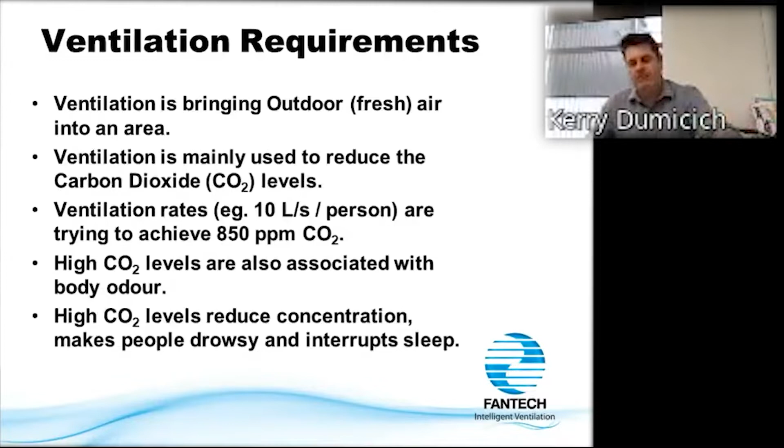Here's a bit from the Building Code of Australia, which says this is the amount of CO2 you should have in a building: 850 parts per million over an 8-hour time period. So while mine was 870 average over 8 hours, it's probably fine, sort of thing.

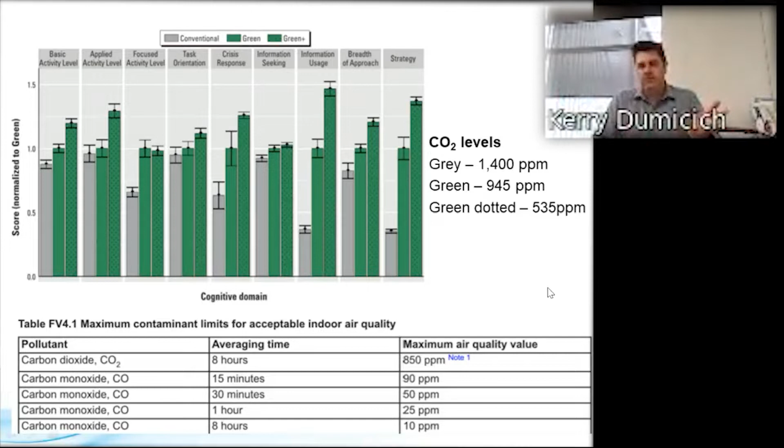Okay, that's all good. But what happens in reality? I've got these little CO2 monitors, which a number of you would have seen before, and I've done a few experiments at home. I gave one to a few people at Fantech, said take this home, put it in your bedroom overnight, and it records the levels over time. One of the employees here at Fantech, the levels got to 5,000 ppm in the bedroom overnight. We're supposed to achieve 850.

So we're 5-6 times the level of what we're supposed to be. We're actually getting to really unsafe levels at those sorts of levels. The reason was he had no ventilation in his room. He's in an apartment building, there were no windows to open, and we just assumed the apartment had good ventilation. It had terrible ventilation. So now he's got to figure out what he needs to do to improve the conditions.

I did it in my own house. My bedroom might have been 1,500 parts per million. I now sleep with the window cracked open a little bit, and that brings it down to about 700, and you get a better night's sleep. So again, CO2 levels affect how we actually sleep. It's actually important for all of us.

So increasing ventilation reduces the CO2 level. It also helps reduce the risk of transmitting viruses in the air, and that's kind of what we're really trying to focus on at the moment. But ventilation is important for lots of other things as well that we don't talk about very often.

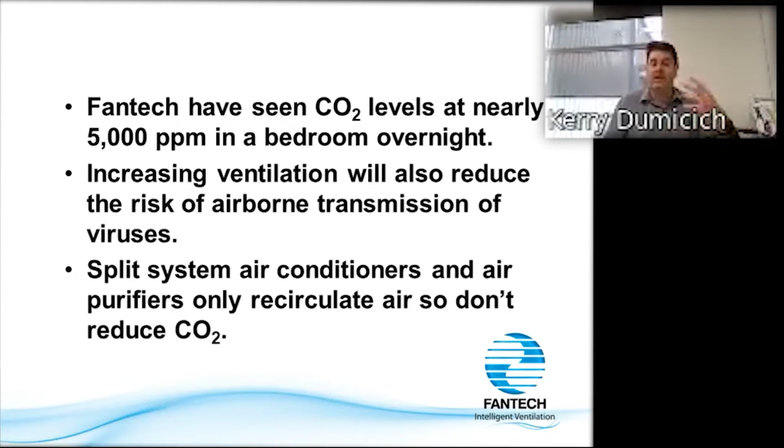When you think about what's typically in a house, you might have some split system air conditioners, and the general thought process is, oh yeah, I've got air conditioning, that's ventilating my house. But it's not. A split system just recirculates the air in your house, so your CO2 levels don't get better. It might be nice and comfortable, nice and cool in summertime, but your CO2 levels will actually be very high. We've got a split system in our house, and I've tested that as well - it just goes through the roof unless you have some fresh air coming into the house.

Okay, so back to the first slide. The best way to reduce the risk of airborne transmission of viruses, such as COVID-19, or it could be cold or flu or whatever it is, is to increase your ventilation rate.

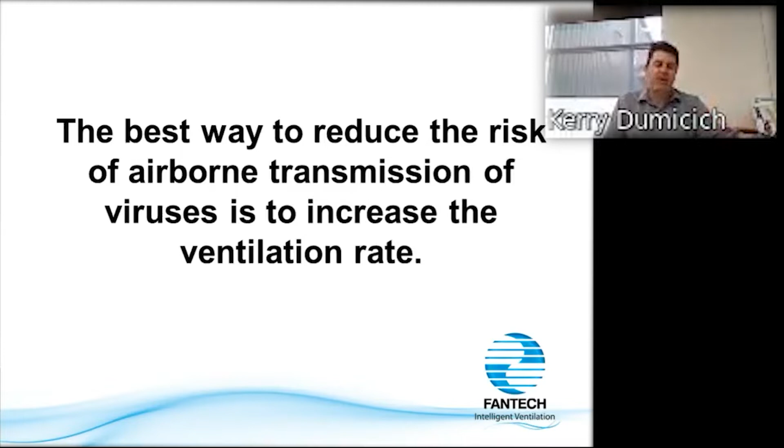So what have we got available? We've got two things we can do. We use mechanical ventilation or natural ventilation. Let's start with natural. Now, natural ventilation, I don't know about you, I was never quite sure what it actually meant, but open the door, open a window. That's natural ventilation. It's just letting fresh air in from outside. It's really simple. So obviously we can do that in most environments.

Lots of buildings, apartments might make it tricky to do this sort of thing, but yeah, it's a really easy thing to do. It's cheap, and it can be really effective, but it only works well when it's windy outside or the temperature conditions are right. So we call this uncontrolled ventilation. So if it's a nice windy day, brilliant. I've got tons of ventilation, tons of fresh air coming in. My risk of transmitting COVID or whatever it is going to be very low.

That's why the governments have told the schools to open windows and doors because this is the best way to sort of stop COVID transmission. Now, it might be great on a 23-degree day, but what if it's 40 degrees outside and you open a window and a door? Now everybody's actually absolutely stinking hot because you're just bringing the temperature inside. What if it's 8 degrees on a cold winter's morning in Canberra or in Melbourne? Well, okay, it works, but it's not suitable under all circumstances.

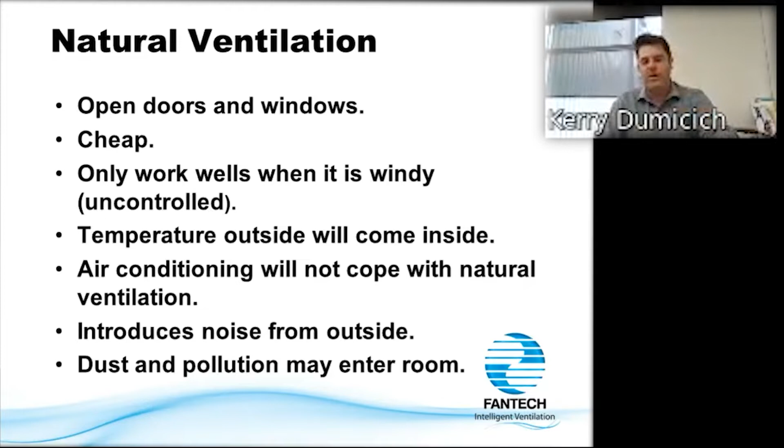Okay, so now we go to fans, mechanical ventilation. It's using a fan to bring fresh air into a room for consistent or controlled performance. If the fan does 100 litres a second of air, it's bringing in 100 litres a second of fresh air all the time. You don't have to worry about the wind conditions outside. It's consistent. Obviously, we still are bringing the outside air in, so it's going to be affecting your air conditioning and heating. So you've got to make sure that your air conditioning and heating system can handle that. But you can size things to deal with that. Obviously, you can bring noise from outside, but you can also have noise from the fan as well. So you've got to make sure we select them properly, which we're all good at doing.

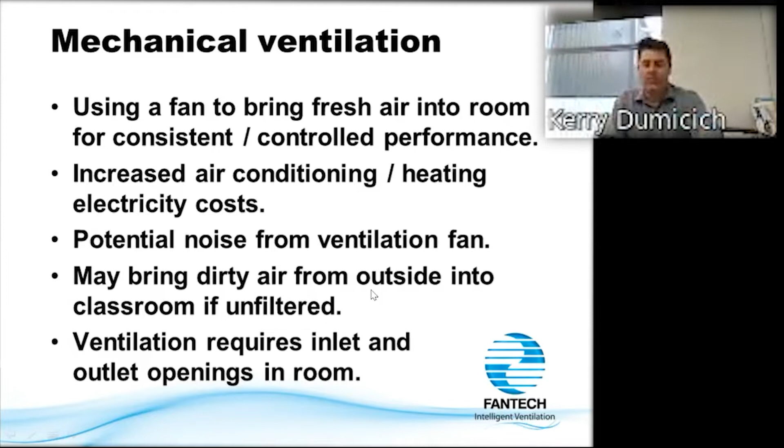And again, we're still bringing outside air in, but we can put a filter on it if we want to make sure we're not bringing in dust and pollutants from a busy road next door, for instance. And we need to make sure we have inlet and outlet openings in a room. We can't just put a fan in and exhaust the air out. We've got to have a way for the air to come into the room to replenish it. So we all know these basic things, but it's not always as simple as just put a fan on the wall and you'll solve the problem. Okay, so ventilation is great, and it is the best way to help with reducing virus transmission. But in many cases, it may not be suitable for an environment.

And if that's the case, then we would look at using air purifiers. So again, fans are always going to be the first thing we try and sell, and that's our primary function. But if it's not suitable to go and put increased ventilation in, then we can use this as an alternative.

Now, the one thing is we're only recirculating air, so we're not reducing CO2 levels. So all those things I was talking about before, we're not helping with this type of product. But we can reduce the virus transmission by using these types of products.

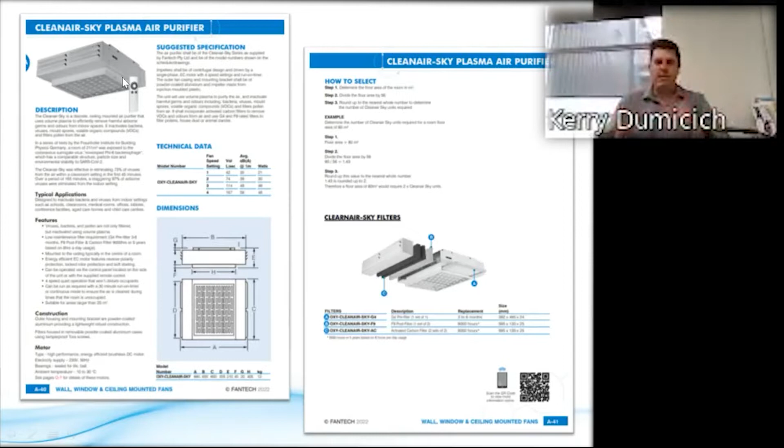So here's a bit of a cutaway from the release that we did, and we'll talk about the product a little bit and how it works, because it's just a little bit different to a typical fan. So what we have here, we have a number of filters attached to our mechanical unit here. And so we have a pre-filter on the inlet. This is what's called a G4 filter, and it's just designed to get rid of large particles such as dust, dandruff, or hair, for instance. So it just gets rid of those big particles that might be otherwise sucked through the unit.

And it's more there to try and protect the rest of the unit, so we're not actually having high maintenance and costs there. So we'll explain as we go through. Once the large particles have been removed by that filter, we've now got our plasma and our fan in this box above it here. And so it's a plasma unit, just a small box effectively with these electrodes which go past it, which produces a high voltage. So as air passes through it, some of it turns into what's called plasma.

Now, I won't go through the definition of what plasma is, but the plasma deactivates viruses and bacteria. It can eliminate pollen. It can reduce odor as well. So by creating that high voltage and turning the air into plasma with this unit, we can actually get these additional effects occurring. It does produce certain contaminants inside that area as well, which we need to be careful with, and that's why we have the other filters in the system.

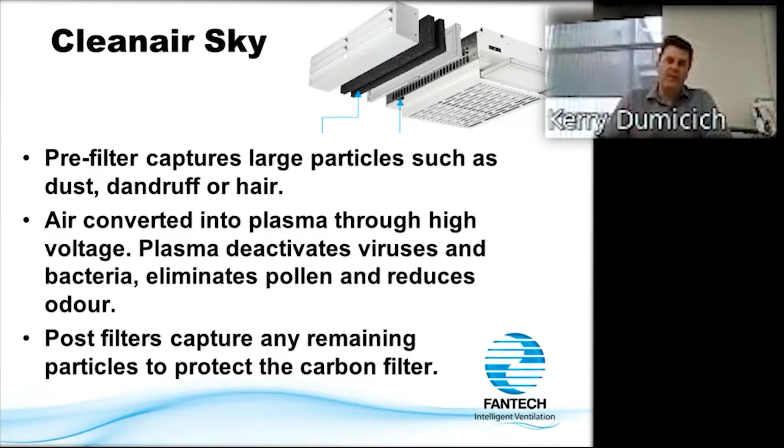Oxytec, actually, who make this product, did tests with and without this F9 filter. It didn't change the amount of virus reduction we got. It's not there to actually help with virus reduction. All it's doing is actually protecting the carbon filter. So you can actually take that out. The unit would work perfectly fine, but it does protect that filter, so we keep it in there effectively. Actually, I don't need to go into that.

Ozone only stays live for a short period of time, converts back to oxygen, so only clean air escapes. So you wouldn't run the unit without these carbon filters, because then ozone could escape. But with the carbon filters on there, you've got clean air which actually escapes out of there. So it's important to make sure that we have the filters in the unit so that only clean air gets out of the unit.

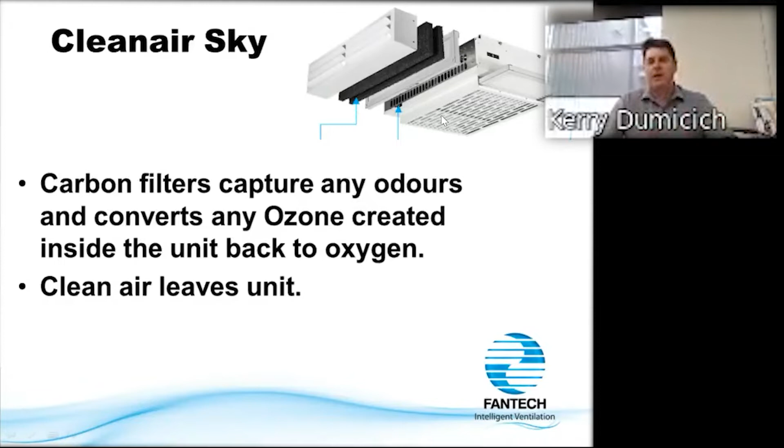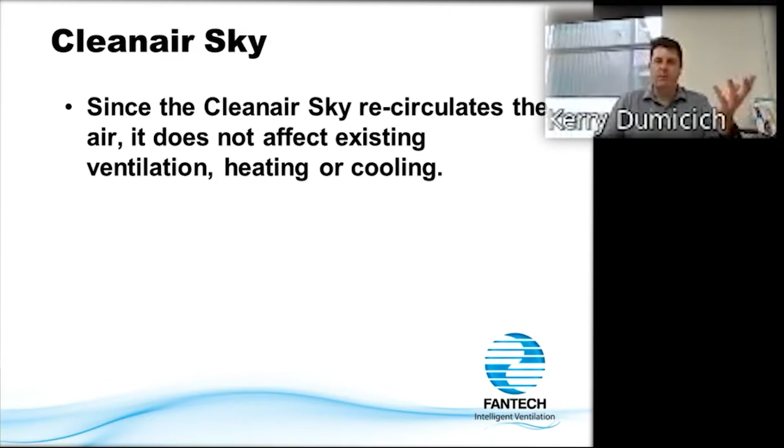Now, since the Cleanair-Sky is just recirculating the air inside an environment, we're not affecting the existing ventilation, heating, or cooling. So you can just put it into any room, and it's not going to affect your mechanical ventilation system, your air conditioning systems you already got there. So it's not like putting a fan on a wall or opening a window sort of thing. We don't have those negative consequences as a result.

So if you're thinking about people who might suffer from allergies or hay fever or even asthma. Now, we can't say this will reduce your asthma, this will reduce your hay fever. It's not quite like that, but some people are triggered by pollen. And if we're then reducing the pollen, well, that may help in that particular case. So it will help in numerous cases, but it will not help everybody, because everybody is going to be affected by different triggers with those particular diseases, I suppose, or symptoms.

But it can help under those circumstances. It may help asthma sufferers, it may help hay fever, but it really comes down to the individual person. So there are benefits here, though. So certainly there'd be some interest in that.

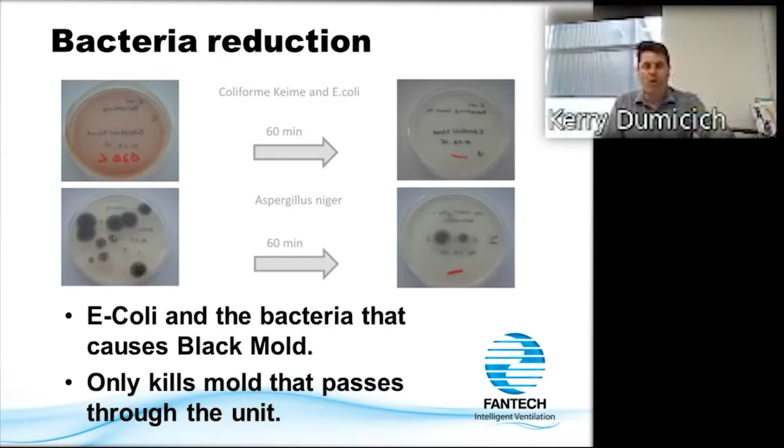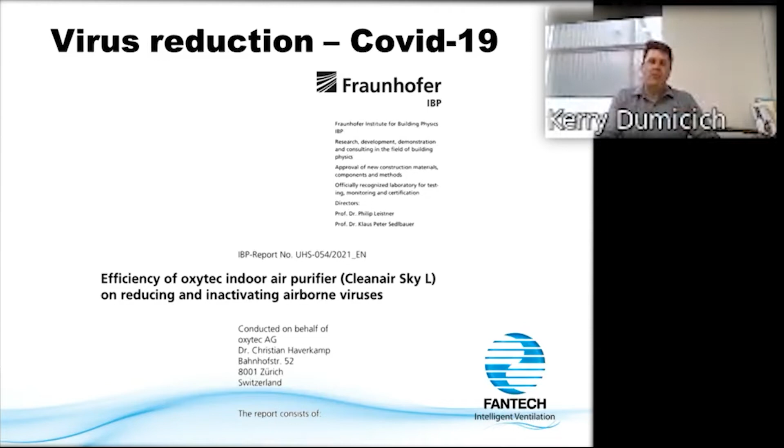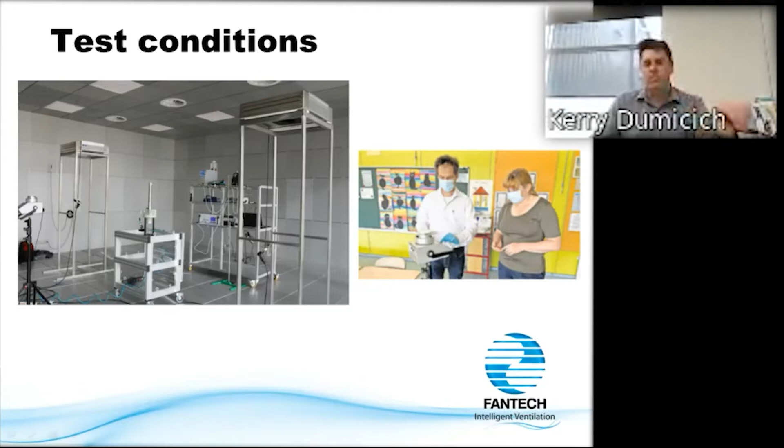So this Fraunhofer Institute is sort of like CSIRO in Germany. It's a top scientific organization in Germany. Obviously, we don't know it here, but that's its function in Germany.

And the unit was placed in a real room, like a typical classroom size, to determine the effectiveness in the environment. So it's not just saying, oh yeah, the Cleanair-Sky, if I just pump viruses directly into the inlet, how effective is it? It's saying, no, if this room is filled with viruses and the unit is just recirculating air in that room, how long is it going to take for the virus levels in that classroom to reduce? So it's different to saying, oh, I'm just pumping air through the plasma unit. It's actually, no, I'm looking at the virus concentration in the classroom.

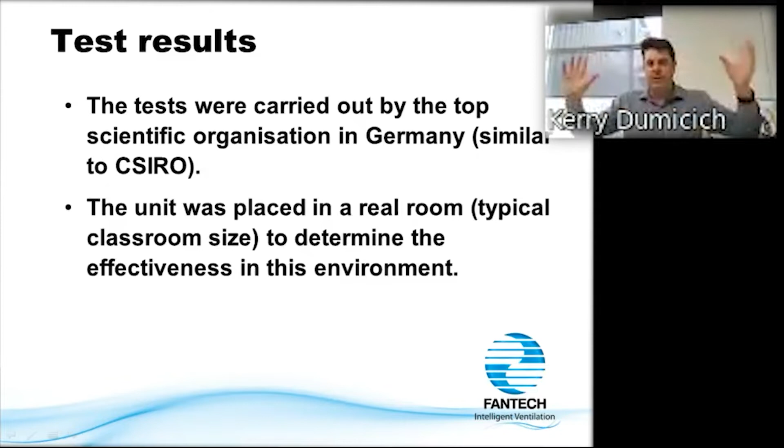And so what they did is they tested a virus, which is called a surrogate virus, which is identical to SARS-CoV-2, which is the virus that causes COVID-19, in structure, size, and stability. So this is the virus you'd use for COVID-19. The issue is you can't just go, oh, let's go and pump a room full of COVID-19, and then we'll go and test it. It's not terribly safe doing that. And you need a huge biosecurity sort of chamber. It would cost millions and millions of dollars to do that sort of test. So while in theory it's possible, the cost would be astronomical.

So what they do is they use a virus which is not as infectious as COVID-19, but has the same physical properties as COVID-19. So they've shown that this is as hard to kill as COVID-19. It's the same size and everything like that. And what we've found is inside that room, so again, not through the plasma unit, but inside the room, the virus level dropped by 97% after a period of 165 minutes.

Now, one thing I'll point out here, you might go, oh, but I see other units which say they can do 99.99% reduction. But this is not the unit itself. This is saying this is what the virus levels in that classroom did over 165 minutes with the air movement patterns and the air going into the Cleanair-Sky, not just pumping the virus directly into the unit and going, oh, look how good we are. We've actually gotten rid of it. We're actually testing it in a real condition.

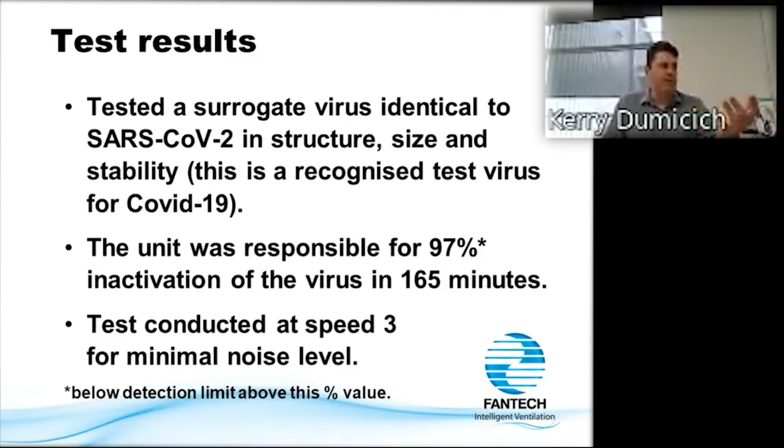The test was conducted at speed 3. This is an EC fan. It's a 4-speed fan, so this is the third speed. It's sort of equivalent to a typical split system air conditioner in your house, or an air conditioning system in your building. You hear it whirring in the background. You can certainly hear it, but it's not objectionable. And therefore, we're not testing it at maximum speed so we get the best result. It's under realistic test conditions.

So why I'm explaining all of that, because this is not how our competitors to this product would test. They don't test in real life situations. So we've tested in a simulated classroom, or Oxytec, the supplier has. Competitors might test in a 28 cubic meter room. That's the typical standard room size for an air purifier test. We're 7.5 times bigger than that. It's going to take longer to do stuff in a room that's 7.5 times bigger than if it's only 28 cubic meters.

Sometimes they just expose things to a Petri dish, like we were talking about before, or they test it in duct. So everything is making sure that we're directing the contaminant towards the unit so we can get the best possible result. But when you're testing in a real environment, you don't have those advantages. Competitors will test at maximum speed because you get the best result, but it's noisy. So we've tested at a reasonable speed.

We've tested a virus which is comparable to COVID-19. A lot of people just test smoke or dust, salt water, or small particles. They're not actually testing against a real live virus. So you don't get the same effectiveness, I suppose. It may be more effective against those particles than it is against COVID-19.

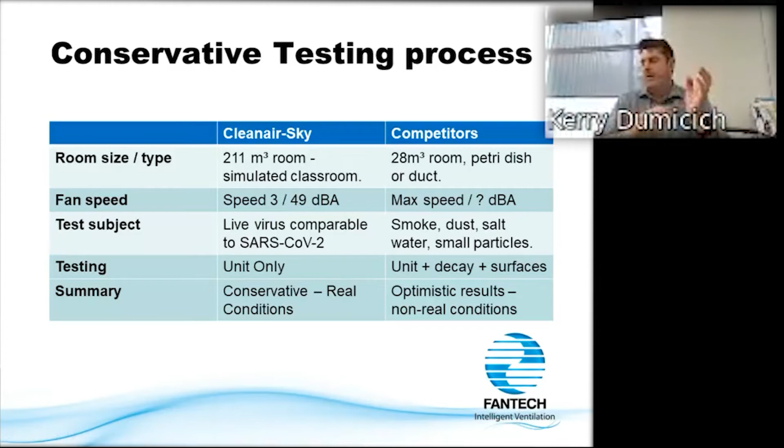We're testing the unit in isolation. Now, what can happen if you've got a room which has got COVID-19 in it? Let's say I've got a wall here, and I've got a virus particle moving around. It hits the wall, it sticks to the wall. Therefore, that's no longer in the air. So when we're saying how much reduction of COVID have we got in the air, well, any particles which hit the wall can be considered as being taken out of the air. And the unit's not doing that. The Cleanair-Sky, the plasma's not deactivating that virus. It's just sticking to the wall, it's sticking to your table.

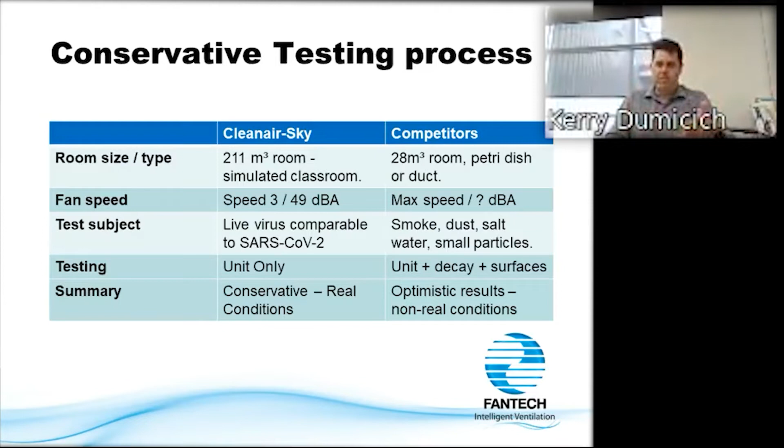But a lot of test processes don't account for that. They say, oh yeah, what's the reduction of the virus? Oh wonderful, we've got a 99% reduction, but you might be testing other things other than the unit itself. Also, viruses die over time. So if the virus takes 2 hours to die and you're testing for an hour, 50% of the virus could be gone just because you've tested over a period of time.

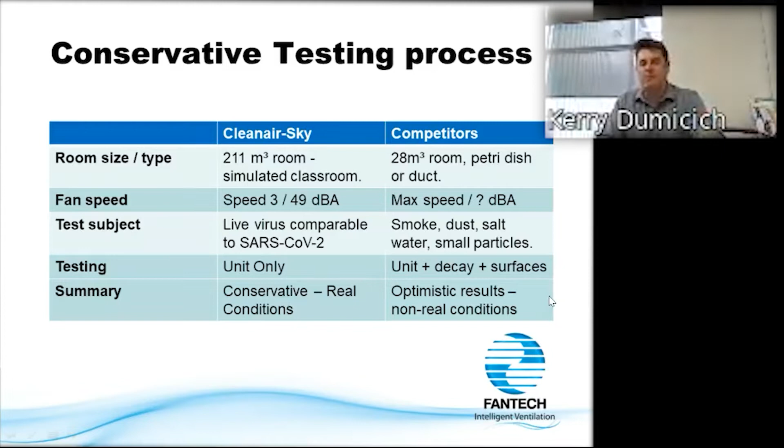But this unit has only been tested for the unit only. The decay due to hitting surfaces, and the decay which is killing off the virus, has been taken out. It's purely what the Cleanair-Sky does to it. So we're using very conservative results. A lot of competitors use very optimistic results under non-real conditions.

We've also got test reports which show how it performs against VOCs. VOCs are volatile organic compounds. This is sort of like the fresh car smell you have in a new car, or when you move into a new house, the paint smell or the carpet smell. These are things which might smell good in some cases, but they're actually bad for us. So the Cleanair-Sky has been tested against a whole heap of these chemicals, and it shows to reduce the levels of lots of them.

It also reduces odor. We talked about body odors before - a school classroom would be a good example of a room full of teenage boys, or cooking. So you have it in an area where you've got cooking, and it can reduce the actual odor from the cooking process. No byproducts such as ozone, aldehydes, ketones, or other chemicals were released into the room air. Like I said, inside the unit, yes, it does create some of those products, but the testing showed that it actually wasn't released into the actual air, which is important.

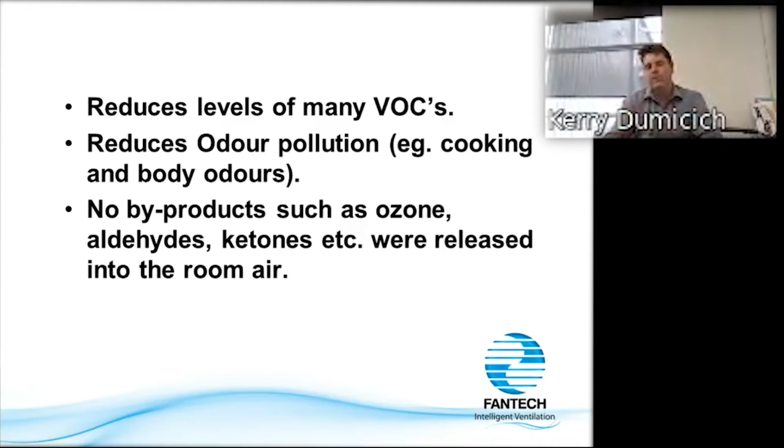Okay, so now let's talk about the features of the product. The Cleanair-Sky needs to be installed by an electrician. You might go, oh, why can't I just get somebody to buy it and have a plug and lead on it? It's actually a positive point. The reason is, what do our customers do? They install things. If we're talking about a school, we'd say, just go and buy an air purifier with a plug and lead on it - they can just go to Harvey Norman, buy an air purifier themselves, cut the contractor out, and do the work themselves. So our customers don't get any sale out of that. So it needs to be able to be installed by a product installer.

Actually, this is important. It's something we wouldn't want to be selling as a standalone air purifier, because who's going to buy it from us? Our current customer base doesn't buy those types of products, because the end user will buy that directly. It's relatively lightweight, 13 kilos, so it's easy enough to lift up and install. Now, the big point here is it doesn't draw virus from person to person. It draws the virus towards the ceiling because it's ceiling mounted.

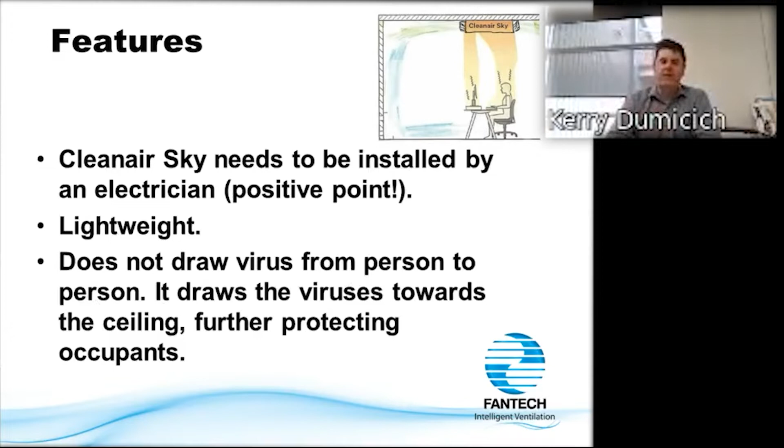So any floor-mounted unit, unless you position it really carefully so there's no occupants between the infected person and the air purifier, it's going to drag that air across other people and potentially infect them. So that's the big fundamental problem with typical air purifiers. They work, but this is the fundamental issue.

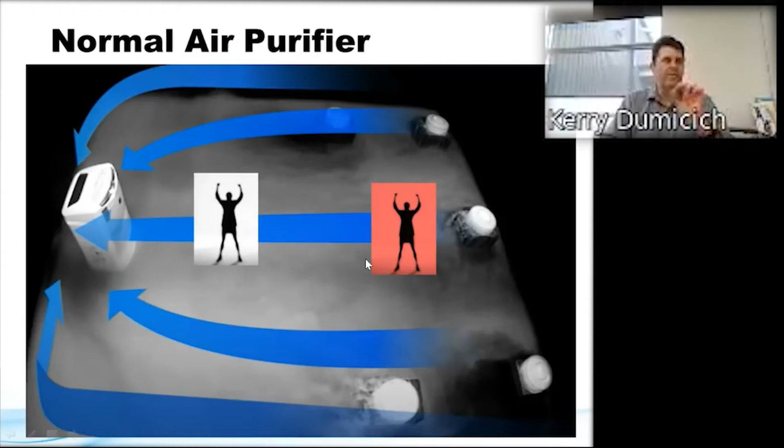A ceiling-mounted unit like the Cleanair-Sky draws air up towards the ceiling. So if somebody is contagious and breathes or coughs, the air is drawn towards the ceiling, but it's not drawn across other occupants. That reduces the risk of transmitting it to other people. So having a ceiling-mounted unit is actually really important.

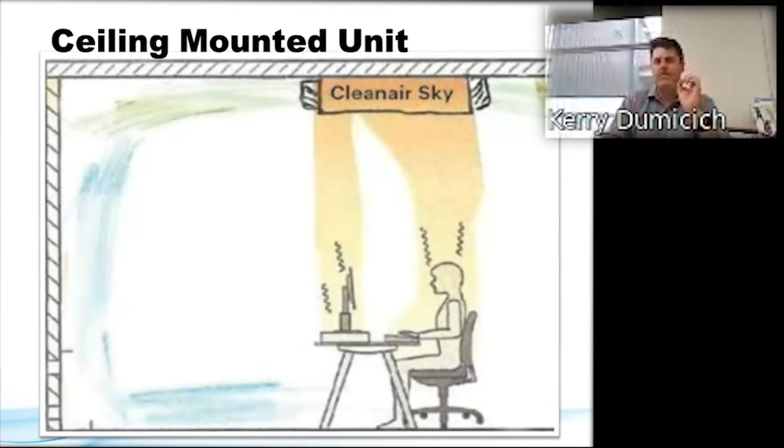Okay, so more about the product. It's quiet - at speed 1 you can't even hear it running. Speed 3 is very, very acceptable. It's lightweight and easy to mount, with low running costs - 39 watts of power at speed 3.

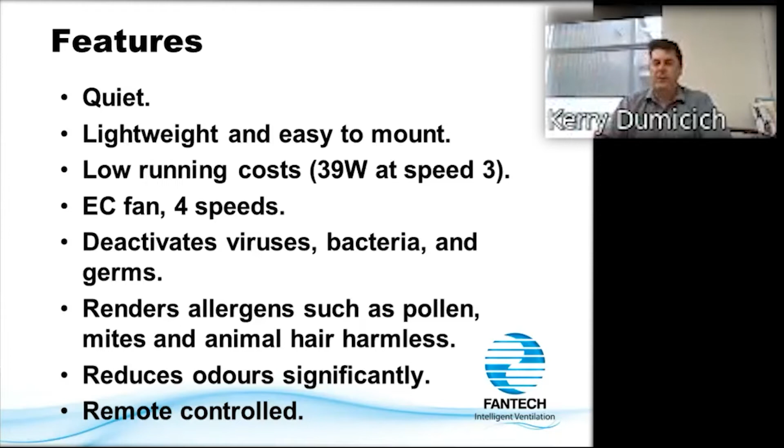Very low electricity cost. It's got an EC fan with 4 speeds as standard, speeds 1 to 4. It deactivates viruses, bacteria, and germs, as we talked about, and renders allergens such as pollen, mite, and animal hair harmless - good for allergies to animal hair and that sort of thing. It also reduces odors and comes with a remote control. The unit can run at high speed when the room's unoccupied, and it'll run on a timer to clean the air once the room is empty - but we'll go through that now.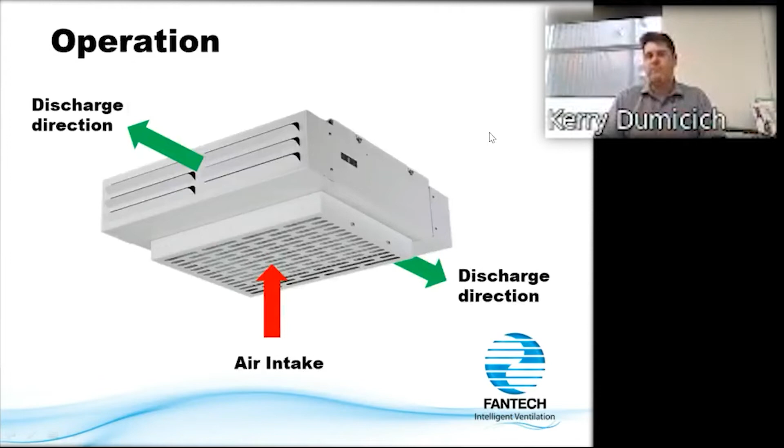The remote control runs on top of the functions I was talking about - this is what you get with the unit. It's sort of like an Apple TV remote if you've ever seen one, just a bigger version - not that big, but yeah.

The functionality is: you've got a plus button, a restore button, a minus button, and a pause button effectively. The plus button increases the speed - so if it's off, press plus, it goes to speed 1, speed 2, speed 3, speed 4. Minus takes it back down - speed 3, speed 2, speed 1, then turns it off.

The restore button starts the unit at the speed at which it was switched off. So if we've got it set to speed 3, because that's the appropriate level, and we press restore, it just switches it back on to speed 3 if it's turned off. Press restore, switches it off. Press restore, switches back on to speed 3 - whatever speed it was turned off at is the speed it restarts at.

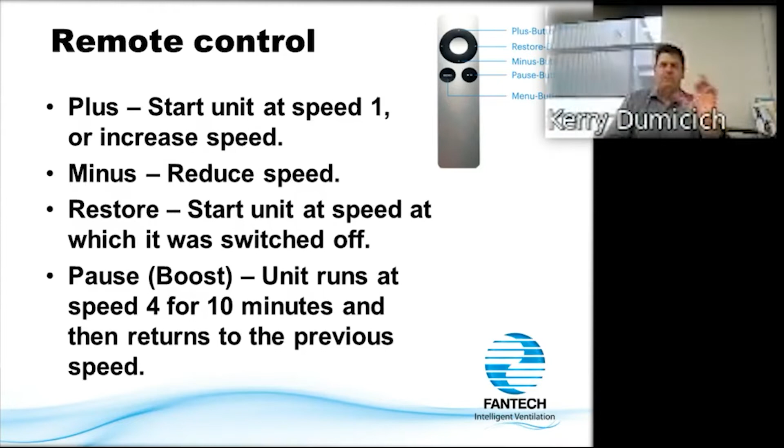The pause or boost button runs the unit at maximum speed, speed 4, for 10 minutes, and then returns to the previous speed. Let's say it's a classroom, since it's all designed around the classroom setting. You get to recess and want extra air cleaning during that time, and you don't worry about the noise because there's no one in the classroom. You press the pause button, it boosts to full speed for 10 minutes - about how long recess lasts - then it switches back to where it was previously and keeps operating. These sorts of smarts are already built into it.

To switch it off, the minus button hits speed 0 - straightforward. We can also press the menu button, which is a run-on timer function. At the end of the school day, for example, you press the menu button and it switches the fan off after 30 minutes - like a purge. We're saying any virus left in the room at the end of the day, we want to get rid of before starting the next day. So it runs for another 30 minutes after the end of the day, switches itself off, and is ready to restart at that predefined speed. Restore saves the speed it switches off at, like we said. It's quite clever - they've thought it through really well for a school environment.

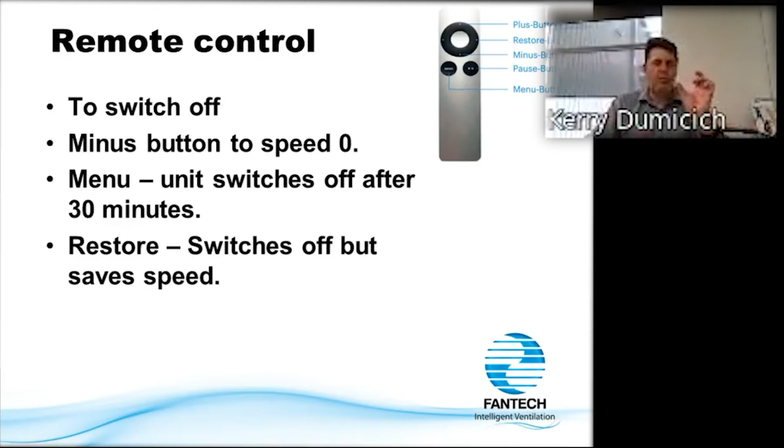Now, while we've got the remote control here, we've also got a display on the side of the unit, which you can use for most of the functions. We've got the menu, minus, plus, and pause. Obviously, you're not really going to be playing with this because the unit's mounted at ceiling height, so you'd have to get up on a step ladder to reach it. But the display on the side tells you what speed it's operating at, whether it's 1, 2, 3, or 4. It can also show you error messages as well.

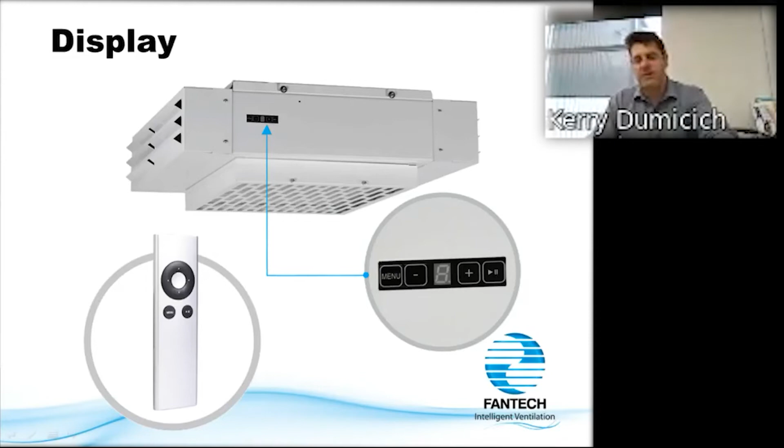There is some maintenance required with this unit. As we were saying before, we've got various stages of filtration. We've got the pre-filter on the inlet of the unit, which is replaced every 3 to 6 months. We've got pricing on all of this, and I'll show you how to do this in a second. The post filter and the activated carbon filter, the two filters on the discharge of the Cleanair-Sky, have a typical replacement time of 5 years, so it's very long life. That's about 9,000 hours, but 8 hours a day, 5 days a week in a classroom works out to about 5 years, so it's actually quite a long replacement time.

There's just a list of the error messages that we've got on the side of the unit. It tells you if the fuse is defective, if the fan's got a malfunction, if you need to change the activated carbon filter, and if the filter is not mounted correctly. So it's got error messages which give you some sort of warning if there's a potential problem.

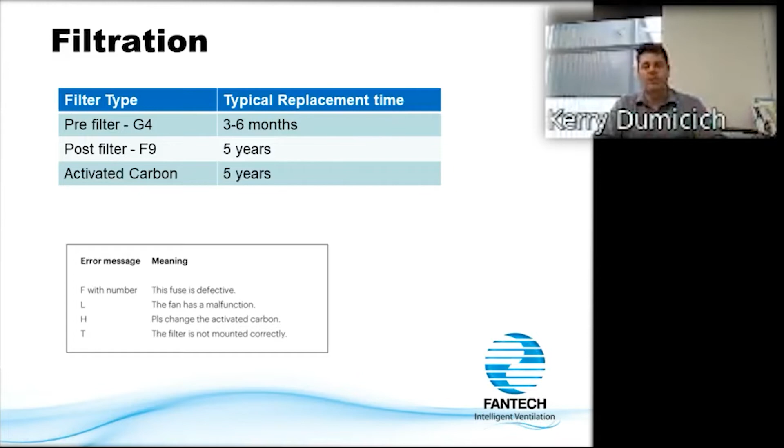So changing the filter, like I'm saying, only the pre-filter needs to be changed regularly. There's just some thumb screws on the bottom panel here, on the sides, you can see 2 screws. You just undo these screws, the unit's hinged, it drops down, and then you can slide this filter out, slide the new filter back in, tilt it back up, and put the thumb screws back in. It's a very simple replacement job. You don't need any special equipment or anything like that. It's not complicated to do.

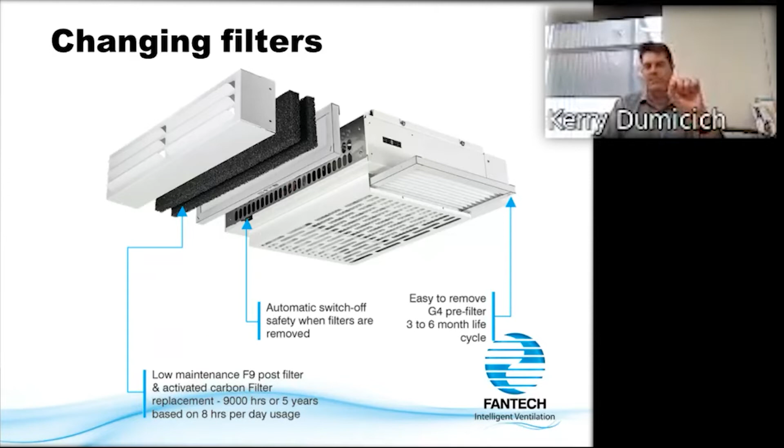With the actual post filter and the carbon filters, what you've got on these discharge louvers is they're screwed in. You need to unscrew those, pull the discharge cover off, take the filters out, replace those, and then put it back in place. There's an automatic switch-off safety switch here, which is a limit switch, so when the filters are removed, the unit can't run. As we're saying, we need the filters there because it produces some ozone inside the unit, which we don't want getting out. So there are safeties in here which stop the unit from operating if the filters aren't installed.

Okay, so what are we comparing against? We're comparing typically against floor-mounted HEPA or floor-mounted air purifiers. Like we talked about before, the big weakness is the floor units draw viruses across the room, and therefore across other occupants towards the air purifier, risking virus transmission. If it's a UV unit, the lamps are expensive to replace. They've got a certain lifespan, but it depends on what brand of lamp you use as to how often you need to replace them. There's also a risk of exposure to UV light, so it's about making sure the unit's made properly.

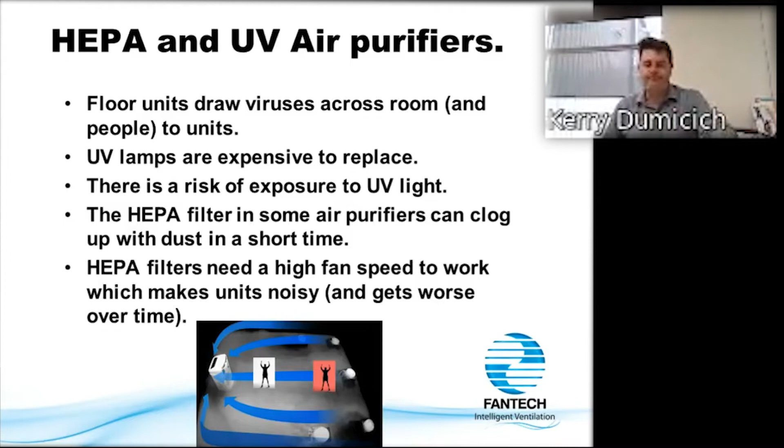You need to make sure you seal the HEPA filters really well if you want them to work. Otherwise, they just don't work properly. And they're expensive to replace.

One thing a lot of people don't think about: we're talking about putting air purifiers in rooms to get rid of something like COVID-19. Well, what if there was COVID-19 in the room, and then you decide to go and replace that HEPA filter? The virus doesn't just die instantly, it can survive for days. On a surface, it can survive for maybe 2 or 3 weeks. So you might think it's all pretty safe, go and take the HEPA filter out and replace it, but that's contaminated. You've now just gone and released the viruses back into the airstream, or you're breathing in the virus. So you actually have to be really careful because of what we're trying to do here. You really need to have protective suits in order to replace HEPA filters. People don't kind of think about that, but it's removing viruses which stay alive.

The last thing is that with a floor-mounted unit, they can be easily damaged. Put it in a classroom, kids are going to kick it or bump into it. It takes up floor space, and it might be a trip hazard. You've got a plug and lead, obviously. So it's a less expensive option, but it's certainly not without its disadvantages.

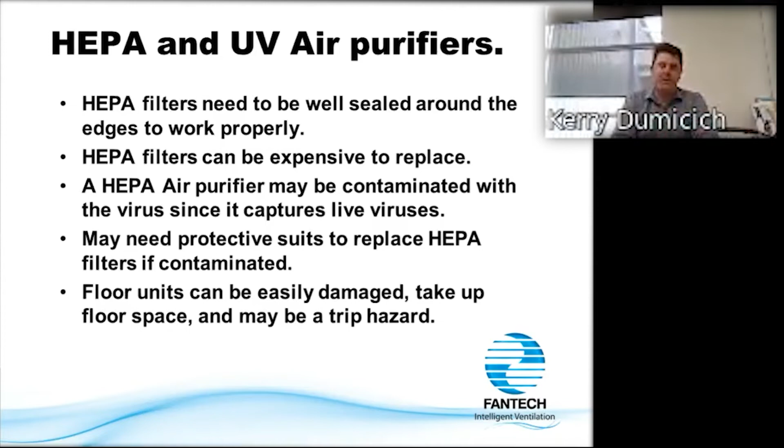Mobile units are plug and play, so end users can buy them themselves. Our customers want to install units, as I mentioned before, so we want to be supplying at least something which requires an electrician to install. Otherwise, it can just be bypassed, and the schools or offices can do it themselves and go away from our customers.

Typical applications are school classrooms and waiting rooms. It could be for allergy sufferers, people with allergies, hay fever, asthma. It may reduce those trigger levels, depending on the person. Also offices, nursing homes, and restaurants. School classrooms is the big thing here, but all these other areas still use this type of product throughout Europe, like waiting rooms in doctors' and dentists' surgeries, where people are waiting and want to be protected.

In office buildings, we might have ventilation systems, but if the ventilation is not sufficient, you can put these in there and it will help reduce the actual viral levels in the office buildings.

Nursing homes are a classic one. We all know about COVID transmission in nursing homes. My mother-in-law is in a nursing home at the moment, and we haven't been able to see her for 6 weeks because there's been COVID cases there and they won't let visitors in. In fact, the residents are locked in their rooms for that period because they don't want to spread it. So anything which can reduce the risk of transmission in nursing homes is important. Restaurants and other places where people congregate are also where this unit is going to be helpful.

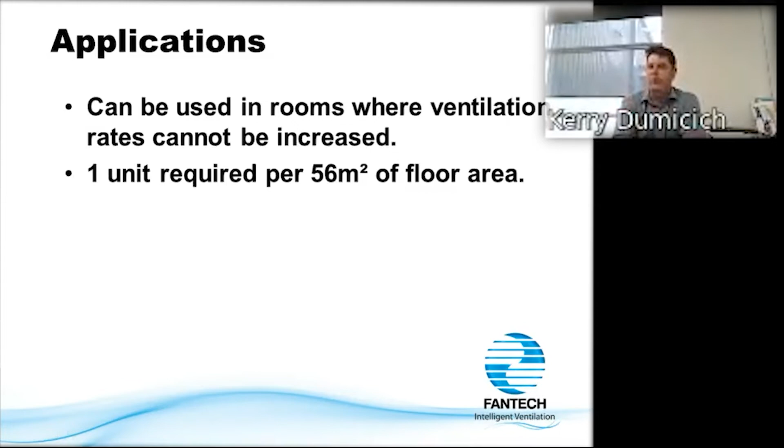For sizing the unit, we use it where we can't increase ventilation rates, using one unit for 56 square meters of floor area.

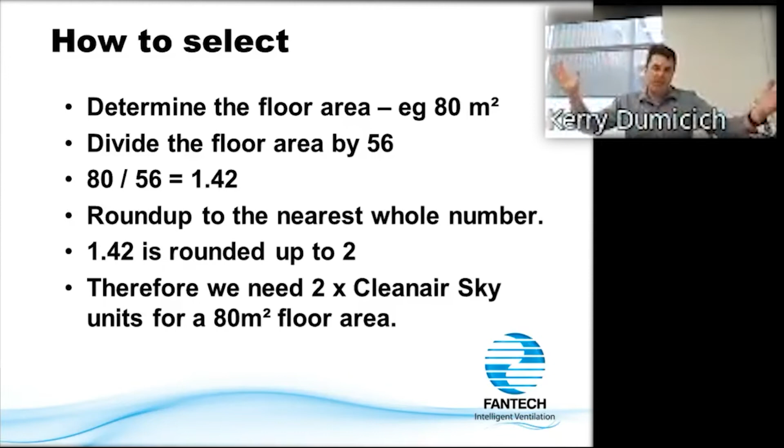To select, just find the floor area, for example a 10 by 8 room is 80 square meters. Divide the floor area by 56: 80 divided by 56 is 1.42. Round it up to the nearest whole number, so 1.42 rounds up to 2. Therefore, you need 2 Cleanair-Skys for an 80 square meter floor area. It's a very basic selection process. We're not talking about airflow rate, just purely floor area, and that's all you need to determine how many units are required for a certain environment.

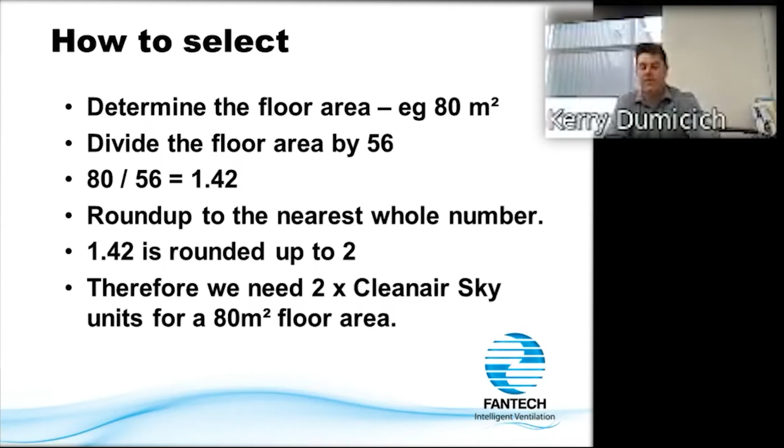Okay, so pricing and availability. Okay, the target sell price is $3,500. So what Fantech have done is they've discounted the margin to include air freight where required. Now, we're not stocking a lot of these units. Like at the moment, we've only got 4 units in stock.

But Germany, where these come from, has got 300 to 400 units in stock. So the idea is that we're actually reducing the margin to include air freight. So if the customer wants it, we can get it here in a couple of weeks' time, sort of thing. So if they want 100 units, it's not an issue. We're going to pay the cost of the air freight, and we'll be able to sell that in a quick period of time.

So we've got 1 sample unit which we've got available for anybody who wants to show it to customers. So if you want to demonstrate this to a customer, we've got 1 unit available which will ship around to the various offices. The only thing we'll say is that because there's only 1 unit floating around, we can't have it somewhere for 3 months just sitting on a bench or something like that.

So if you've got some meetings booked, speak to Troy DeVries, who's the product manager, and he'll organise for the unit to get back and get sent to you. And like I said, once you finish your presentation, we'll get it back and then we'll send it to the next place. So we'll need to book that out to do the presentations.

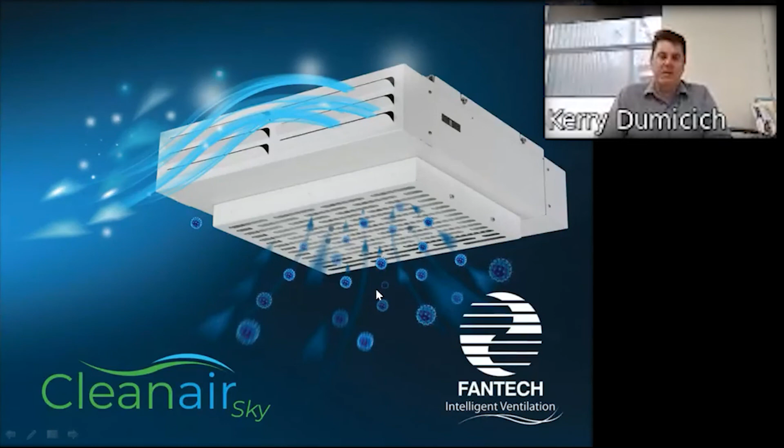I was just thinking about the plasma, because plasma would surely create a bit of heat. No, it's something called cold plasma. The sun is plasma, and I wasn't going to go into this sort of detail, and that's what you think about as plasma, so it's millions of degrees Celsius. Obviously, this is not millions of degrees Celsius because you'd burn the whole building down. The plasma doesn't produce any heat, so it's a zero heat generator, or it's so minuscule that you wouldn't even measure it. It's called cold volume plasma, but it doesn't generate heat, so you don't have to worry about that. Thank you, mate.

Just one more second, mate. Nikki has a question. If the filters aren't replaced when they should be, will it then be harmful and start leaking ozone into the classroom?

No, I mean, as long as the filters are present, even if the filters don't get changed. You'd want the actual activated carbon to be changed effectively after 5 years, because if the activated carbon filter does get full, but again you've got the warning message on the side, well then there's a risk that you start releasing some ozone. But as soon as you replace a filter, no, there's no risk again.

And again, it comes up with a warning message when you get into the time that you need to change the activated carbon, and it will pre-warn you as well, sort of thing. It's not saying, oh yeah, you get to 2 years afterwards, now you've got a problem. It's telling you when it needs to be done.

Okay. And is there any minimum ceiling height for this one? Not really, because you can't get access to anything, but we'd recommend the same as a ceiling fan. Just do it at least 2.1 meters above ground level. You don't want to bump into this, obviously, if you're walking around. If you stick your hand up, there's nothing to come in contact with, so I wouldn't be worried about it from a safety perspective. But yeah, it just makes sense. Don't mount it too low. No worries, thank you.